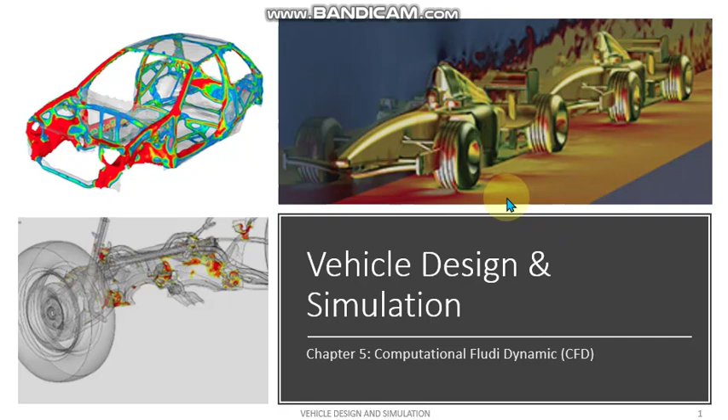Okay, so today we will continue our lesson in a new topic, which is computational fluid dynamics, or what we call CFD. So what is CFD actually, and what do we learn in the CFD topic? Students who take a PSM topic related to CFD need to know more details about this topic, right? So what does computational fluid dynamics mean?

It's a prediction of the fluid flow which involves heat, mass transfer, phase change, and chemical reaction using computer software. So actually it's a fluid analysis using the software. In other words, CFD is a branch of fluid mechanics that uses numerical analysis and data structures to analyze and solve problems that involve fluid flows. So it's not exactly only focusing on the fluid, we are also focusing on the air.

There are many sectors that use CFD analysis in their work environment. For example, in the automotive sector, DaimlerChrysler is the pioneer, the first company to use CFD in the automotive sector, focusing on the flow analysis of the vehicle in order to calculate the drag coefficient or the heat flow in the engine bay, for example. And also Speedo. Speedo is the first swimwear company to use CFD analysis.

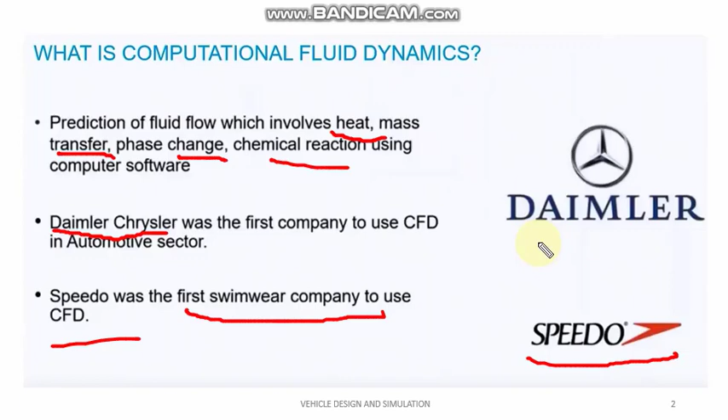Basically, in studying fluid flow, we have three ways. First is experimental fluid dynamics, which focuses on the experimental way, the actual way to study the flow. For example, this figure shows how we study the flow for a vehicle using a wind tunnel. In order to see the drag coefficient of the vehicle, we need to do an experimental study on the prototype vehicle placed in the wind tunnel or smoke tunnel, and then we can see the air flow of the vehicle, whether the drag coefficient is high or not for the shape of the vehicle.

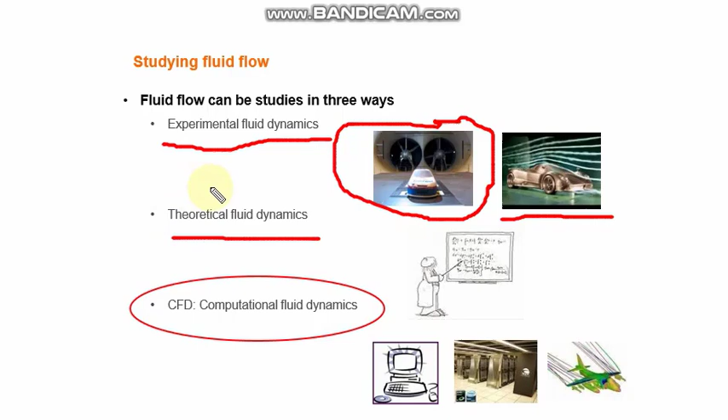Besides that, we have theoretical fluid dynamics. It's mathematical equations to calculate the fluid dynamics, the theory. You already learned this in the subject fluid mechanics, or thermodynamics, or in your case maybe thermofluid. So this is the theoretical calculation behind CFD.

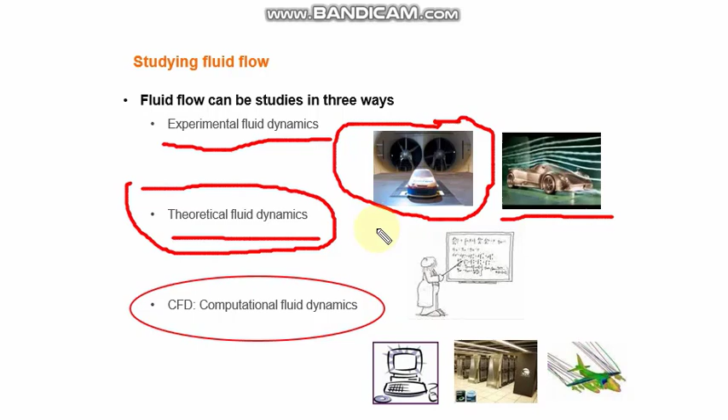And now we are focusing on computational fluid dynamics, which is related to software. We are using software to calculate the fluid flows. It's not experimental, and it's not theoretical fluid dynamics with mathematical equations, but software. The software will calculate the fluid flow, the drag coefficient, the thermal analysis. All the CFD analysis is done in software. That is the objective of what you learn in CFD, right?

Okay, these are the types of CFD analysis. The first example is a turbulent model, a flow analysis of a cylinder. The second one is the wind turbine blade: how the wind flows when it hits the turbine blade. You can see the wind flow here, and whether the shape, the design of the wind turbine, can solve the wind turbine problem or not.

Or you can use CFD for cooling. You want to study the cooling system in your vehicle, the engine cooling, the thermal analysis in your engine. You can use CFD software to study the engine cooling, the thermal mapping. This is a transient ACCI coupling.

You can also study the velocity and pressure field for the vehicle, for example this race car. You can study the flow, like I said before, the drag coefficient, the wind flow analysis. And you can also determine whether the shape of the vehicle is suitable or not to get the ideal performance of the vehicle. Right.

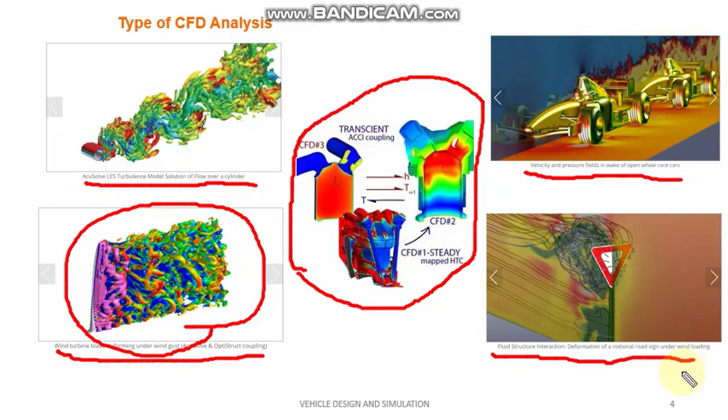Right. Okay, so this is a family of fluid mechanics. You already learned about fluid mechanics. You still remember that in fluid mechanics, you learned the experiment of laminar and turbulence. So you need to revise it back. What is the fundamental of fluid mechanics? I cannot explain it in more detail, because you already learned it.

Okay, so in fluid mechanics you have two behaviors of the fluid. The first one is fluid statics, and the second one is fluid dynamics. So we are focusing on fluid dynamics, not on fluid statics. In fluid dynamics, we have two behaviors of the fluid. The first one is laminar, and the second one is turbulent. So you need to know what is laminar, and you need to know what is turbulent.

Okay, so in the laminar behavior, we have Newtonian fluid and also non-Newtonian fluid. In the Newtonian fluid, we are focusing on the ideal fluid and also the viscous fluid. For ideal fluid, you have compressible flow and also incompressible flow. So in CFD, we are focusing on the viscous fluid. For viscous fluid, we have CFD and also the solution specific regime.

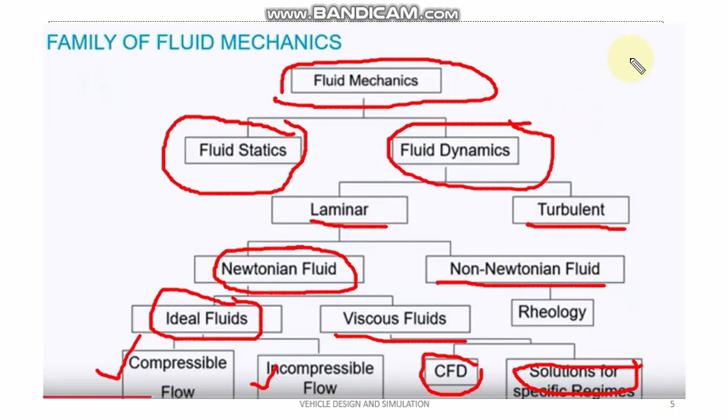Okay, so this is a family of fluid mechanics. I don't need to explain it in detail because you already learned about this in the fluid mechanics subject. So I just explain roughly what fluid mechanics is here.

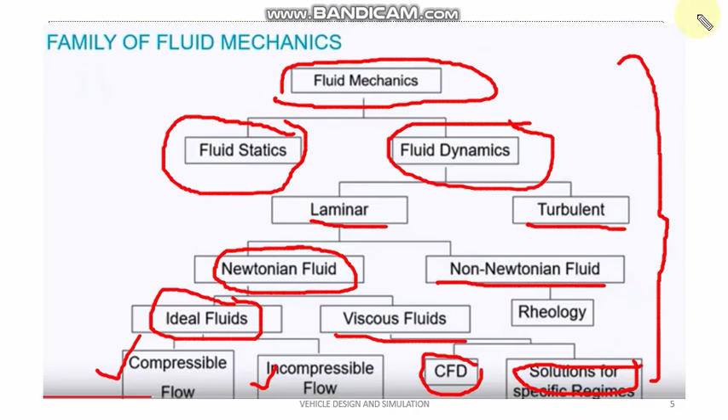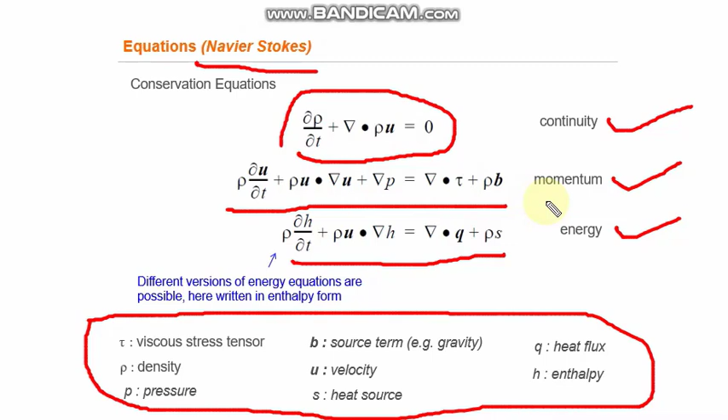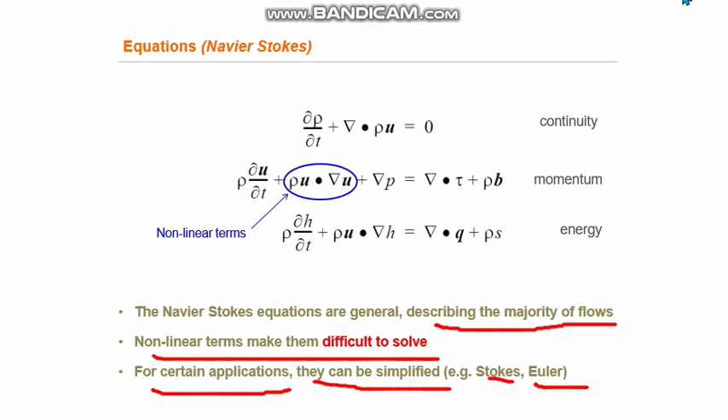Okay, next. So the Navier-Stokes equations are general, describing the majority of flows. Non-linear terms make them difficult to solve. For certain applications they can be simplified using the Stokes or Euler equation. So if you want to run CFD in non-linear ways, maybe you cannot choose Navier-Stokes. Maybe you can choose the Stokes equation or Euler equation to solve the CFD problem, right?

So this is an example of the Stokes equation. For the Stokes equation, the convective terms are neglected. So this is a convective term, small compared to the viscous term. Reynolds number is low. Okay, so what is Reynolds number? You need to remember it. You need to know what a Reynolds number is.

Okay, the fluid velocities are low, viscosity is large. So an application using Stokes is creeping flow, in lubrication or lava. So if you want to simulate lubrication, for example, how the lubrication flows in an engine, you can use the Stokes equation, right?

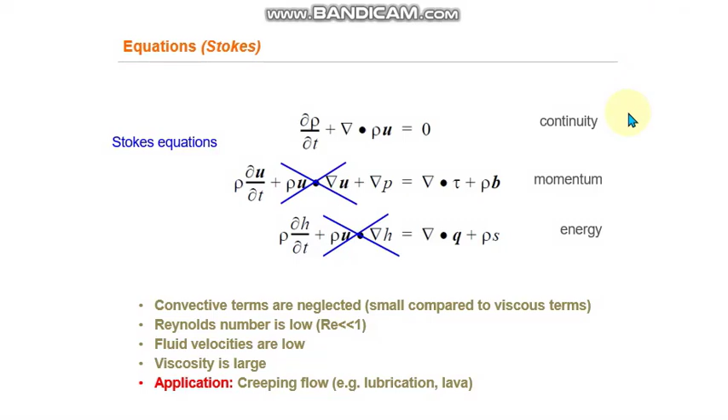So next is the Euler equation. In the Euler equation, viscous terms are neglected. So this is a viscous term. We neglect it because the wall effects are too small. So it is applicable when there are no solid boundaries in the flow domain. So the combination is the Euler equation in the far field, and the boundary layer equation including viscous effects near the wall. Okay, so the application when we want to use the Euler equation.

So basically in the aerospace domain, to obtain the pressure loading, gas dynamics or shock waves. This is basically the application when we want to simulate in the aerospace domain or gas dynamics. You can use the Euler equation, right? So you can use this equation for this. So don't be afraid of this equation. We cannot calculate it by hand. You're just using the software to simulate the CFD analysis.

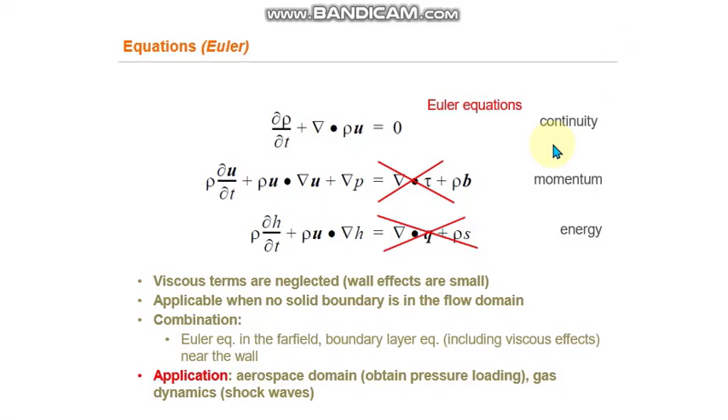Alright. Okay, CFD solver technologies. Solver means how we want to simulate, how we want to run. There are several solvers that you can use. In the primary technologies, we have finite difference, using Phoenics. We have finite volume. You can use software Star-CD, Fluent, SC/Tetra, CFD++.

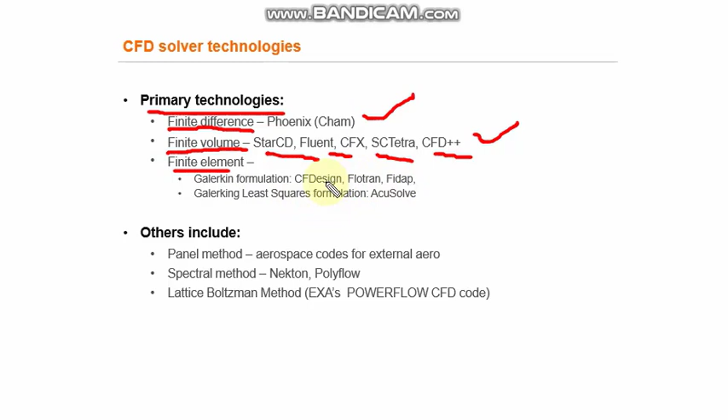Okay, in finite element, you have FLOTRAN, FIDAP, and this is AcuSolve. So basically in this subject we are focusing on finite element analysis using CFD, and we are using the AcuSolve solver.

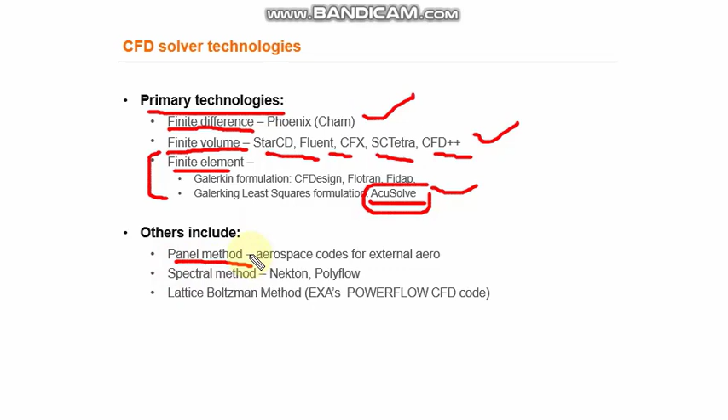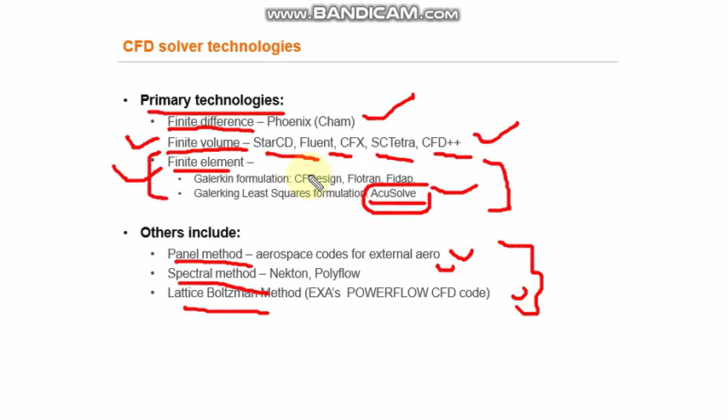And others: we have panel methods, aerospace codes for external aero. We have spectral methods, Nekton, Polyflow, and lattice Boltzmann. So these are other application solvers. But for this subject, especially in automotive, we are focusing on finite element and also finite volume. But in this chapter we are just focusing on finite element using AcuSolve. Alright.

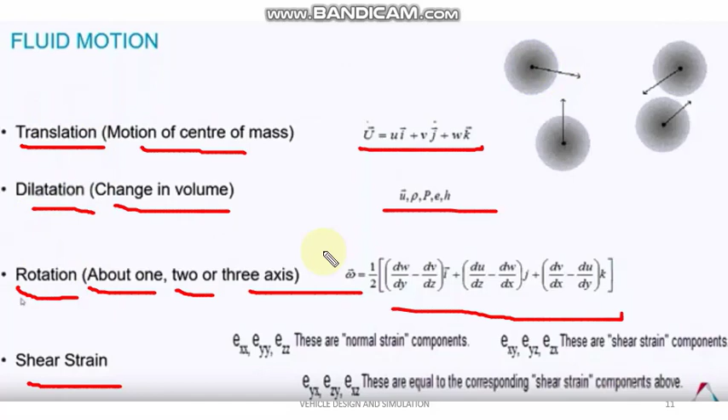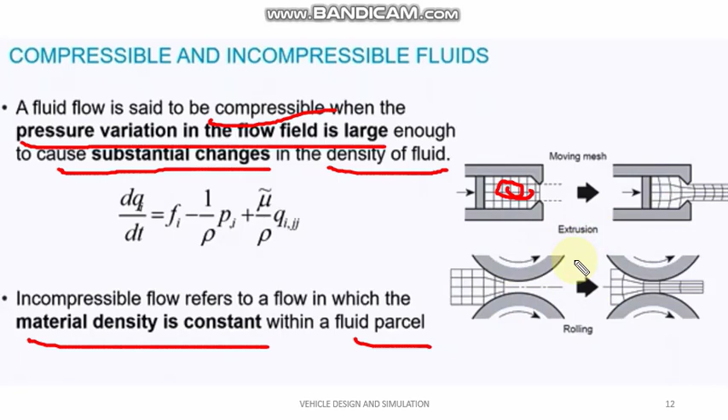Okay, so viscous and inviscid fluid. In a viscous fluid, the fluid friction has a significant effect on the solution, where the viscous forces are more significant than the inertial forces. So this is an example of the equation. In inviscid flow, the viscosity of the fluid is equal to 0. Inviscid flow has many applications in fluid dynamics.

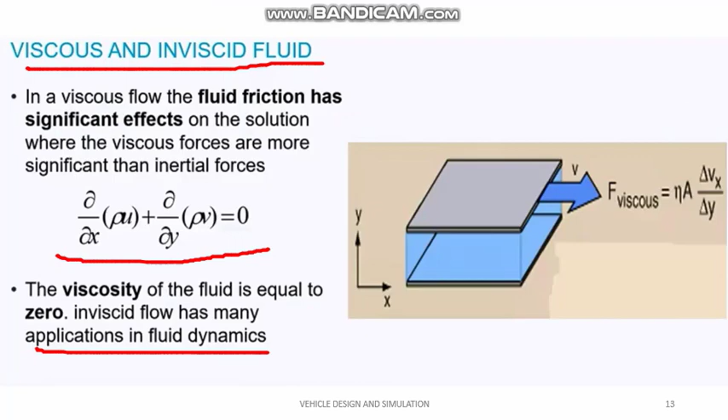Alright, so this is Newtonian fluid and non-Newtonian fluid. What is a Newtonian fluid? A Newtonian fluid is a fluid in which the viscous stress arising from its flow at every point is linearly proportional to the local strain rate. What is meant by that? We're focusing on the viscosity. Viscosity is constant here. We can refer to this graph of shear stress and shear rate.

So for a Newtonian fluid, the stress is directly proportional to the rate, so it gives a linear region, because the shear rate is directly proportional to the shear stress, and the viscosity is constant. A non-Newtonian fluid is a fluid that does not follow Newton's law of viscosity. This means that the viscosity is not constant, and the shear stress is not directly proportional to the shear rate. So that's Newtonian and non-Newtonian fluid.

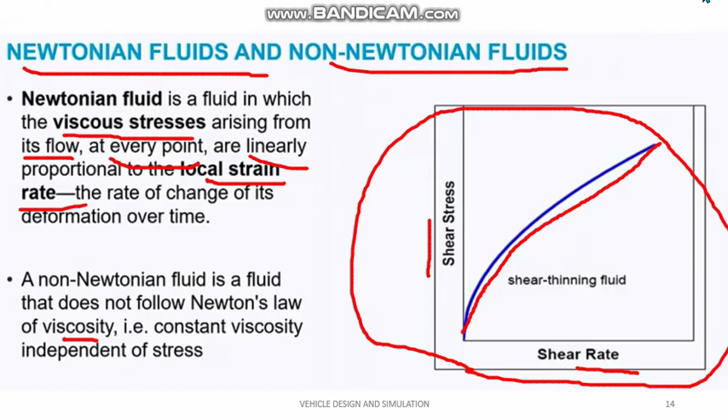Right. So what is laminar and turbulent? You already know these terms. Laminar is fluid flowing in parallel layers with no disruption between the layers. So basically the fluid in a laminar condition is steady, with no disruption from outside. For turbulent flow, the fluid undergoes irregular fluctuation or mixing.

Okay, fluctuation and/or mixing. The speed of the fluid at a point is continuously undergoing change in both magnitude and direction. So in other words, in turbulent flow the fluid has a higher speed, and the behavior of the fluid is not a steady state. It's not a steady state.

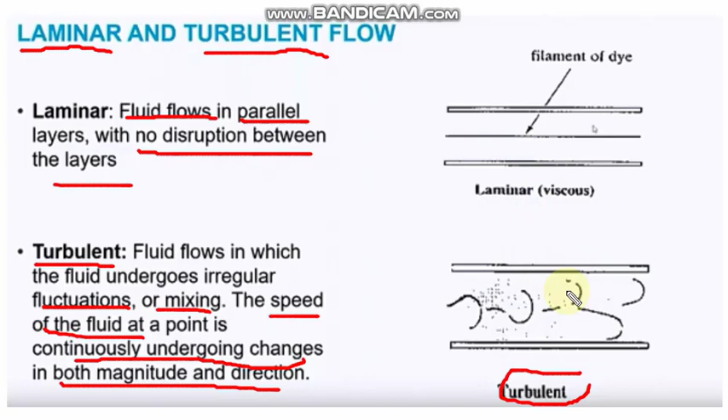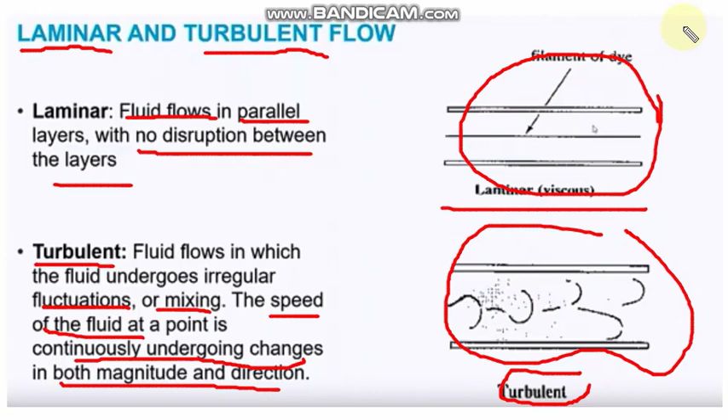Okay, so this is an example figure of laminar flow. This is laminar; the fluid is steady. And this is turbulent; the fluid is not in a steady state. Right. So why is turbulence modeling important? The turbulence determines the point of flow separation. Same boundary condition, different turbulence model.

For example, this is a ball here, and we have a fluid or air here. When the air or fluid hits the ball, from the steady state condition, it can show turbulence. This is turbulent. So unsteady, aperiodic motion in which all three velocity components fluctuate, mixing matter, momentum and energy. Different separation point, different flow pattern, different performance, for example the drag coefficient of a car or the lift coefficient of an airfoil.

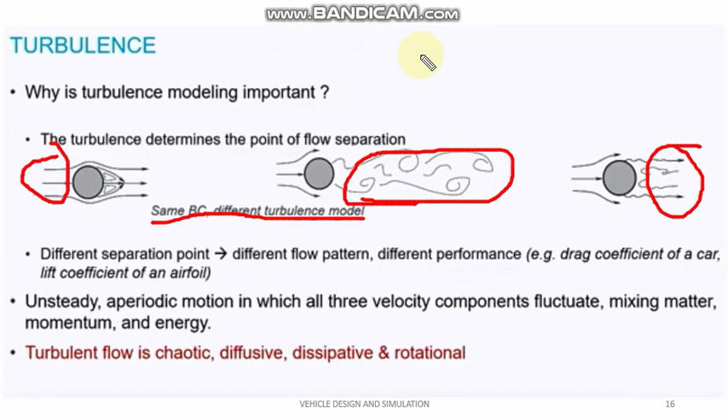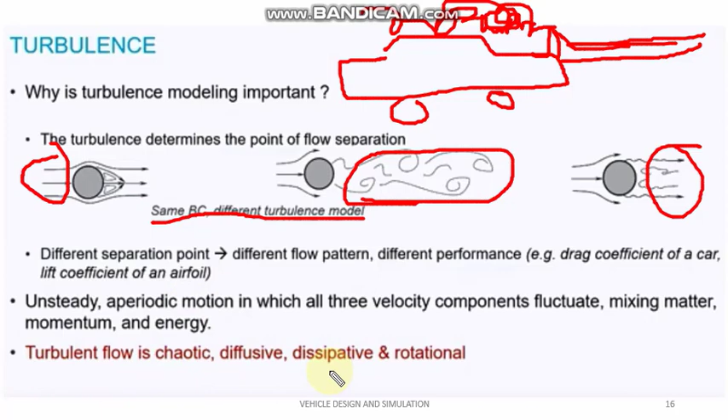For example, we have a car here. I just draw it. So when the wind hits, for example, a spoiler here, the wind flows from the steady state, and when it hits the spoiler, the wind becomes turbulent. It will separate, giving us a separation point here. So this is what we call drag, the drag coefficient. Turbulent flow is chaotic, diffusive, dissipative and rotational. Alright.

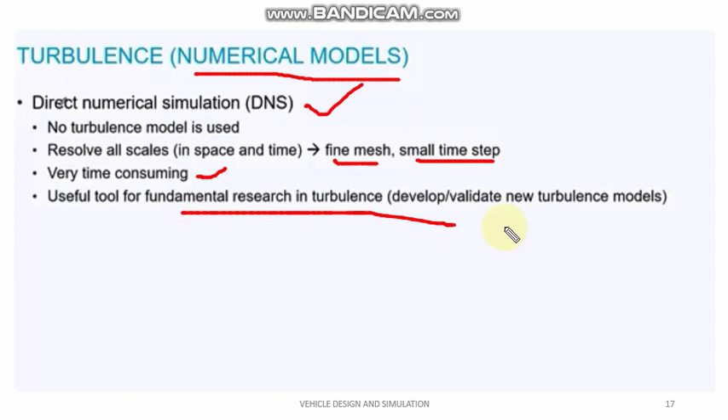Next we go to turbulence numerical models. We have several types of numerical models in turbulence. In CFD we are focusing on the turbulent situation, not laminar. So first is direct numerical simulation. For direct numerical simulation, no turbulence model is used. Resolve all scales in space-time. We have a fine mesh, small time step, and it is very time consuming to run this simulation. It is a useful tool for fundamental research in turbulence, to develop and validate new turbulence models. So this is direct numerical simulation.

Next we have unsteady, which is transient, or steady. Turbulence is by definition unsteady, but we are often interested in mean values and/or the fluctuation. From a statistical point of view, you can see it as a steady state flow. So this is the transient mode for the numerical model of turbulence.

Next we have Reynolds-averaged Navier-Stokes equations. This is another type of numerical model, which is a time-averaged equation of fluid flow, yielding averaged flow quantities at steady state. Very popular approach. Basically you will use Reynolds-averaged Navier-Stokes in CFD analysis; it's a very commonly used equation. Common models are k-epsilon, k-omega SST, and Spalart-Allmaras. You can choose which one to solve in the equation: Spalart-Allmaras, k-omega, k-epsilon, SST, for example.

And wall functions are used to model the velocity gradient near the wall. We need to build the wall. Advantage: no extremely fine mesh near the wall, but the first layer thickness has to be in a certain range. So we need to build the wall of the fluid flow before we run the CFD on a certain object, right?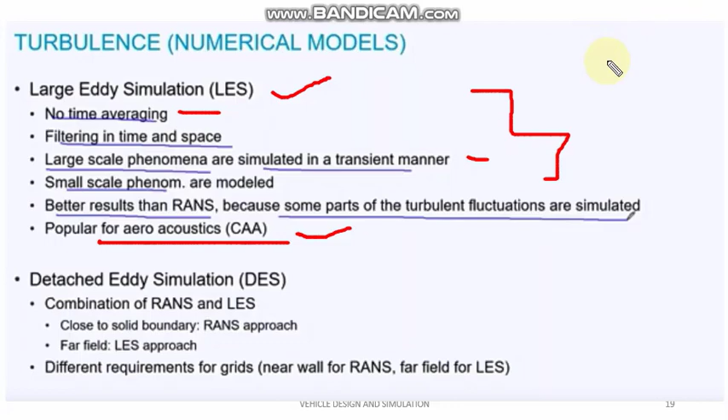Next is detached eddy simulation, DES, a combination of RANS and LES: close to solid boundaries, the RANS approach, with different requirements for the grid. I will not state the detail. So these are some examples of turbulence numerical models. This is a pyramid view of computational time for the modeling. So these are the computational fluid dynamics parameters.

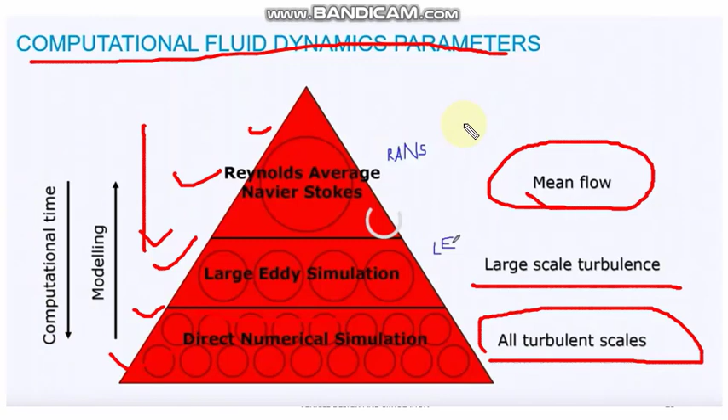So before you run the simulation, you need to mesh. You already know how to mesh in HyperMesh, so you need to mesh the model before you run the CFD simulation. Same, it's a pre-post step, but it's quite different compared to finite element analysis. If you want to run linear static or non-linear analysis, the meshing is quite different compared to CFD meshing.

In CFD meshing, the fine mesh focuses on the area where the fluid flow is higher. Other than that area, you can roughly mesh; the element size can be bigger. But in the focus area of the fluid flow, you need a fine mesh, where the element size is quite small, in order to capture the fluid flow.

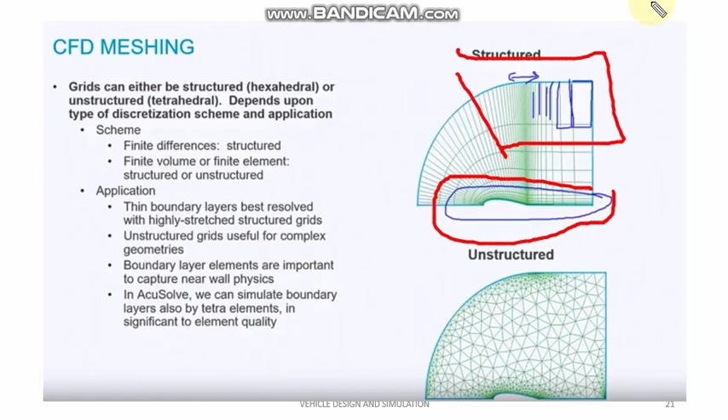Before you run the CFD solution, you need to set up the pre-processing model: to mesh, set up the boundary conditions, set up the flow, outflow, inflow. You do the pre-processing before you run the CFD simulation. So these are common boundary conditions that you need to know and set in your model. The first is the inflow.

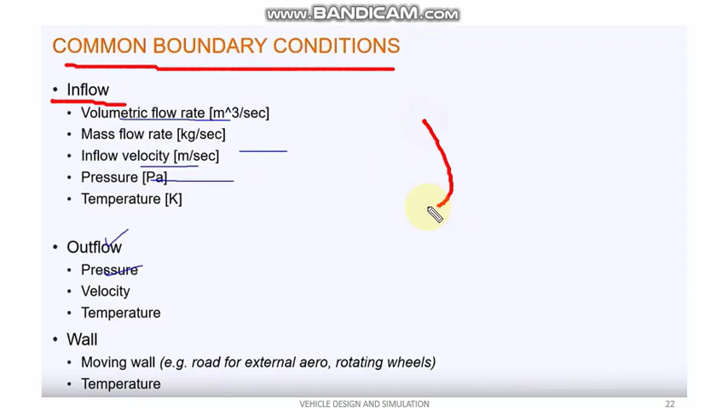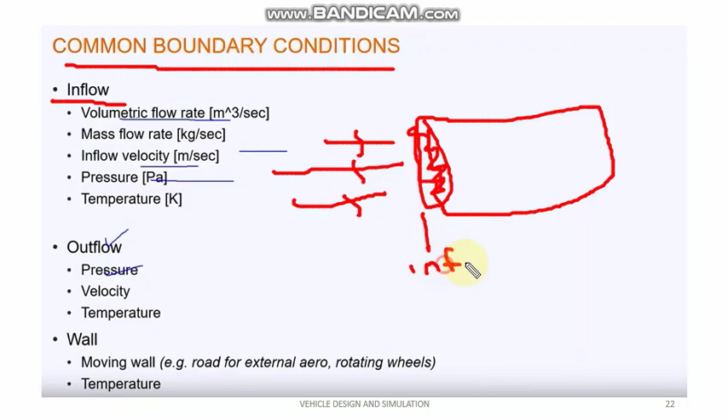What is meant by inflow? Inflow is where the fluid or air is taken in to your model. For example, we have a pipe here. Let's say the air or fluid will come in here, so you need to set this region as an inflow. In the inflow you have to set the volumetric flow rate, mass flow rate, inflow velocity, pressure or temperature.

Next is the outflow. What is meant by outflow? When the fluid or air is taken into your part, it moves through your part and then goes out. Going out is the outflow, so this region is the outflow. You need to set in your simulation where the inflow area is and where the outflow area is.

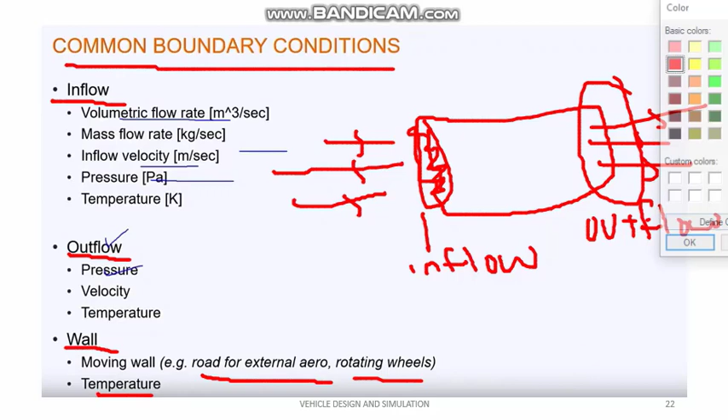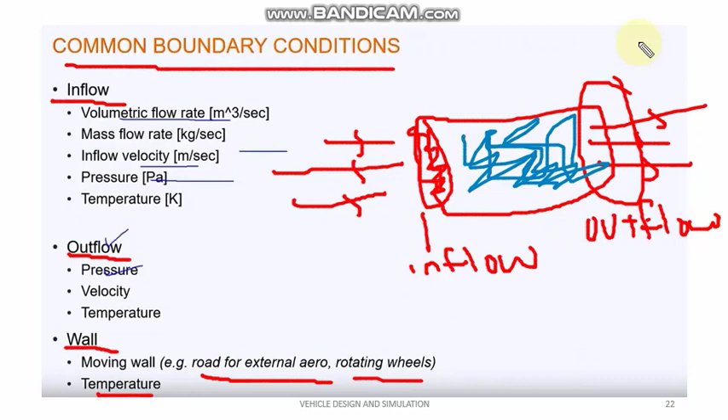And then we have a wall, which can be a moving wall, for example road for external aero, rotating wheels or temperature. So where is the wall here? This is a wall. For example, the pipe here, this is a wall. So this is an example of what is meant by inflow, outflow, and the wall.

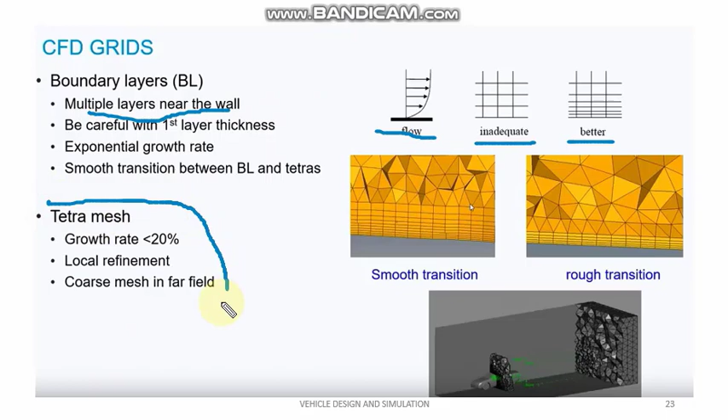So you need to set the boundary layers for your object. We have a tetra mesh. This is a meshing setup. For tetra mesh, the growth rate must be below 20%.

We have a local refinement. What does local refinement mean? In the critical area we need to refine the mesh, using smaller sized meshing elements so that it captures the critical area. We also have a coarse mesh in the far field, meaning in the not critical area we can roughly mesh it with bigger elements.

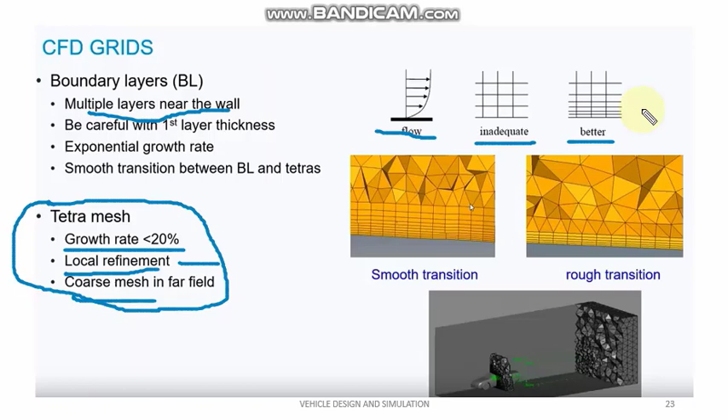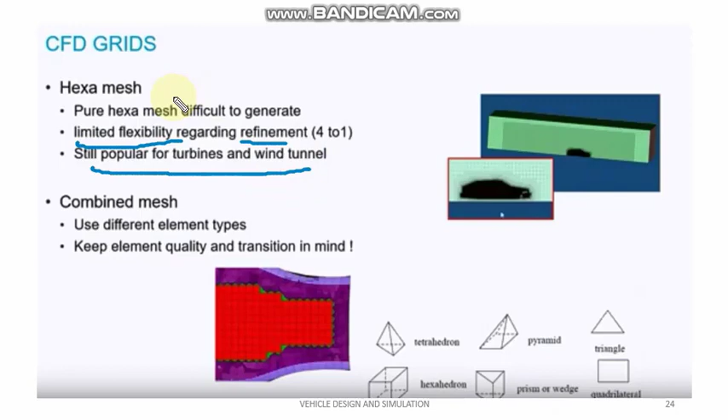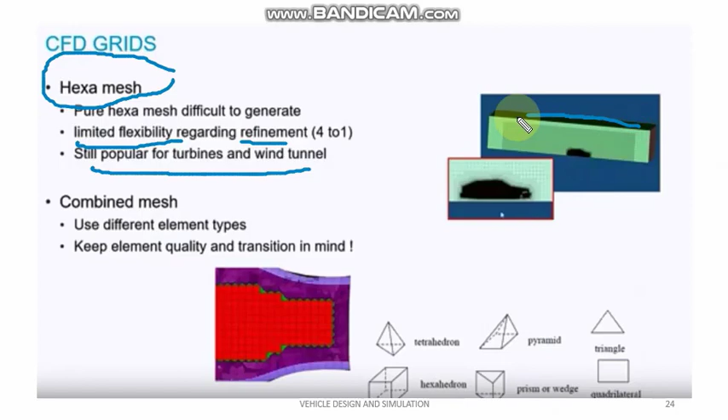And we have a hexa mesh. Pure hexa mesh is difficult to generate, has limited flexibility regarding refinement, and is still popular for turbines and wind tunnels. So basically we are using hexa mesh for the wind tunnel only, for example this area, wind tunnel. It's not for the object, it's not for the car, just only for the wind tunnel.

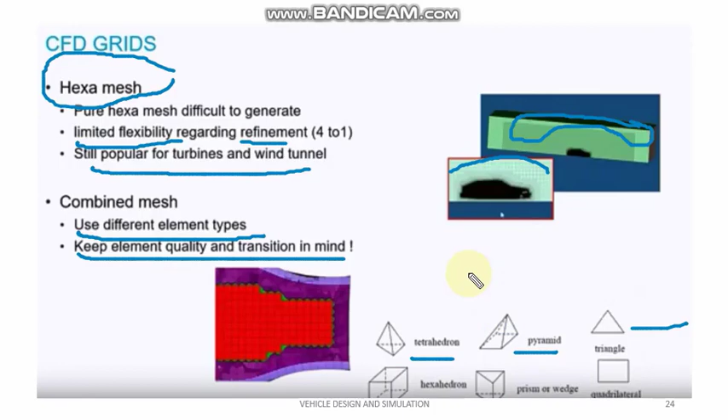And also the combined mesh, where you can use different element types. Keep element quality and transition in mind. We have tetrahedron, pyramid, triangle, hexahedron, and many types of elements for 3D meshing. So this is a CFD grid.

And initial or boundary condition. For initial condition, we have to set the pressure and also initial velocity at all points in the flow. So before you set the boundary condition, you need to set what is the initial condition of the object, the initial pressure for the fluid, and also initial velocity of the fluid.

And also the boundary conditions, you need to set the walls, inlets, outlets, which largely specify what the solution will be. So like I said before, you need to set up the walls, the inlets (inflow), and the outlets (outflow).

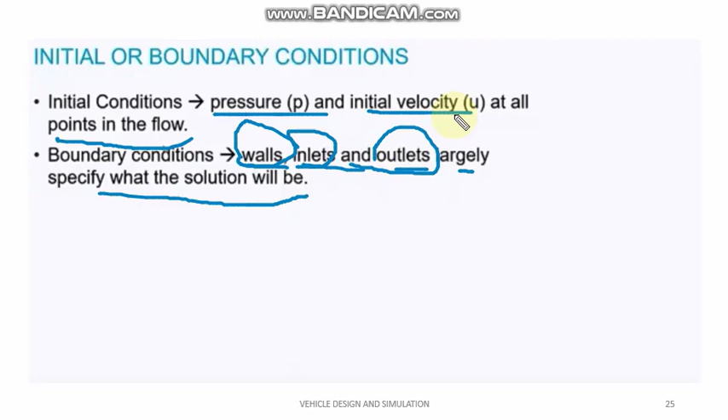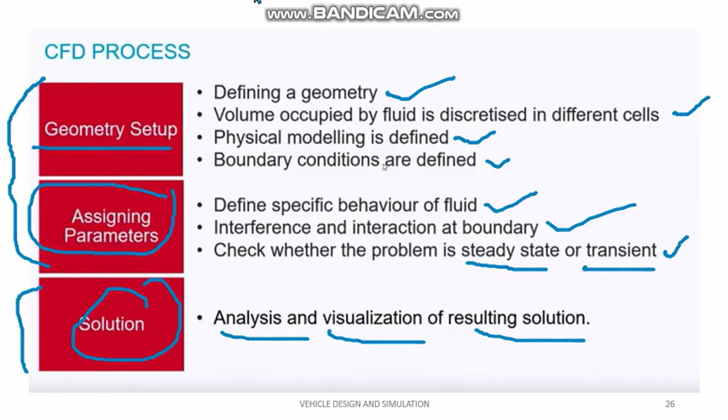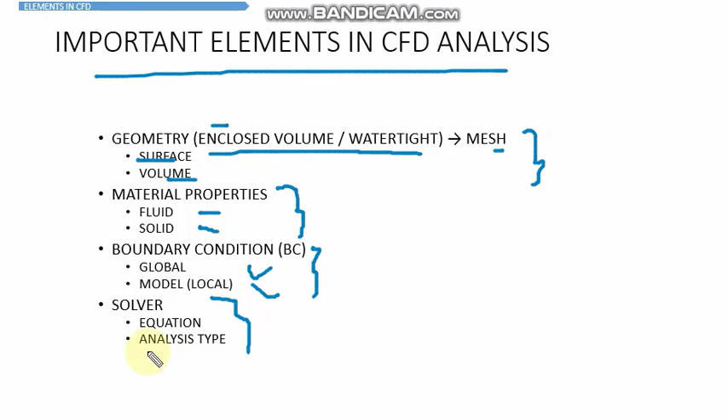And we have to define a solver, what type of equation. I already explained different types of equations. We have RANS, for example, and then you can choose what type of equation you want to use, and also the analysis type.

So that's all for the introduction and theory of computational fluid dynamics. I will explain details in the video regarding the lab practice on CFD, what it means by turbulence, setup, boundary condition, all that in the lab practice video.